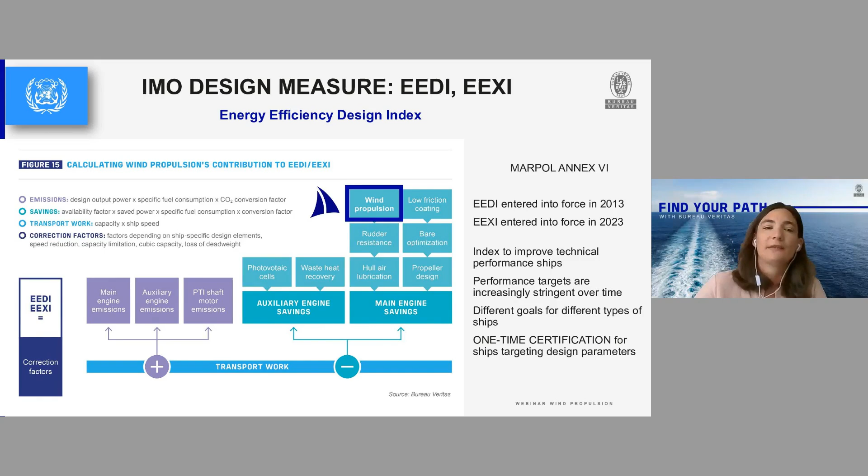So now, to go into detail on the EEDI calculation, on this slide you can see a big formula. What I want to show you here is how wind propulsion impacts the calculations. As I mentioned just before, wind propulsion contributes as a main engine savings device by deducting the available effective power of wind propulsion from the main engine power. I also want to highlight that wind propulsion can reduce deadweight capacity due to increased lightweight, and this impacts EEDI and EEXI calculations, even though it's generally a minor effect.

Concerning calculation of the effective power of wind propulsion, it is provided in the IMO guidance, circular 896, which defines calculation of the wind propulsion power and the power consumption of wind propulsion systems that needs to be added. We also note that by sorting the force elements in descending order and reducing the wind probability to the half with the best performance, it is a form of weather routing. It considers that the ship will reach wind conditions suitable for the wind propulsion system, and this method is debatable today.

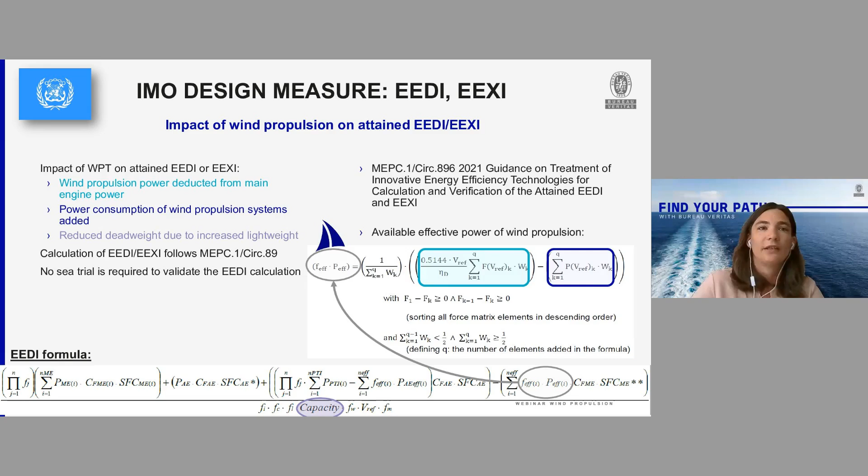The calculations involve complex matrices. They include a force matrix, which can be determined by wind tunnel model tests, CFD or full-scale tests, provided by the wind propulsion provider. They also involve a power consumption matrix, also provided by the wind propulsion provider, and the global wind probability matrix, defined by IMO guidance 896. All of these matrices are given according to wind direction and wind speed, with 5 degree steps for wind angle and 1 meter per second steps for true wind speed, from 1 to 25 meters per second.

It is worth noting that the results of this calculation method may differ from actual predictions, because only one ship speed is used, the reference speed, and not the operational speed profiles. The ship draft is also usually at maximum summer load, and route optimization is not really considered. We have seen that it considers the half-best performance with good wind conditions, and the local wind conditions for specific routes are not confirmed, because we consider a global route and not a specific route. That's why I don't recommend using this EEDI result to predict savings for specific routes on ships.

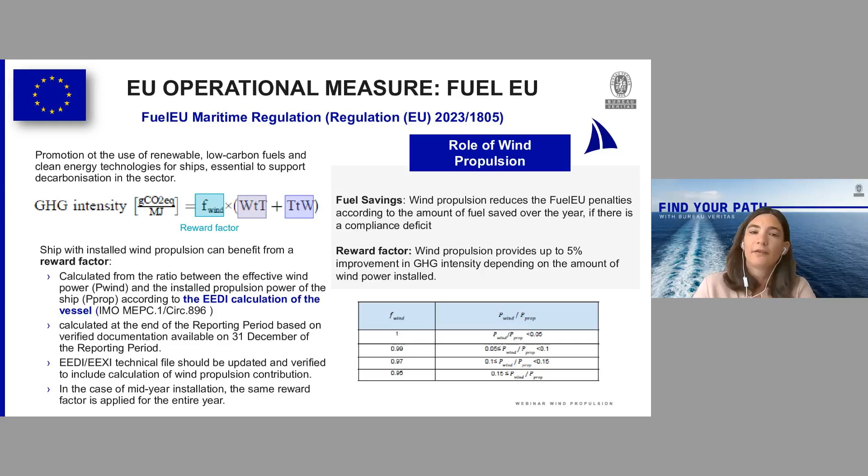It is also important to note that in case of mid-year installations, the same reward factor is applied for the entire year. So for a retrofit of the wind propulsion system at the end of the year, it allows the application of the reward factor for the entire year.

So now let's dive into a practical example to illustrate how wind propulsion can impact compliance and penalty under the FuelEU Maritime regulations. So here are some examples. In the first scenario, we have a wind propulsion system with a power output of 900 kilowatts and a main propulsion power of 7,000 kilowatts. It gives a reward factor of 0.97, and it means that the compliance balance improved by more than 1,000 tons CO2 equivalent. And so the penalties are completely eliminated, achieving a reduction of 100%.

So for example 2, in this scenario, the wind propulsion system is operational for the full reporting period with a power output of more than 1,000 kilowatts, and the main propulsion power is more than 6,000 kilowatts. So the reward factor we get is 0.95, and it improves the emissions by more than 2,000 tons of CO2 equivalent. So the penalties here are also completely eliminated.

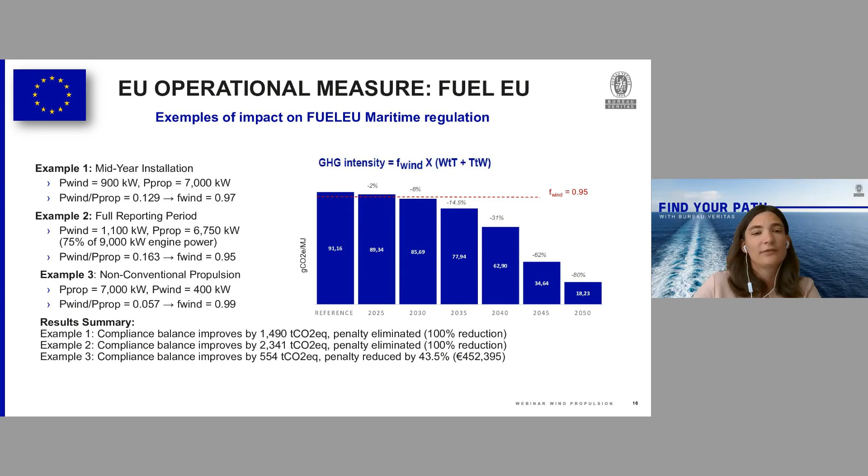For example 3, the main propulsion power is 7,000 kilowatts, and the wind propulsion power is 400 kilowatts. So we get a reward factor of 0.99, and it improves the emissions by more than 500 tons CO2 equivalent. So the penalties are not totally eliminated, but are reduced by 43%, equating to savings of 452,395 euros. So this example demonstrates that it is possible to eliminate partially or totally the penalty when considering wind propulsion installations.

So another regulatory framework for European emission reduction is the EU ETS, the Emission Trading System. There is no special consideration for wind propulsion under this mechanism, but wind propulsion will have an indirect impact based on fuel savings. For example, with an allowance at 75 per ton of CO2 equivalent, each ton of fuel saved equates to approximately 300 euros in avoided EUA cost. So with the examples presented in the previous slides, we see that the costs saved from fuel savings from wind propulsion are between 41 kilo euros and 175 kilo euros.

So to finish on the regulatory landscape, I hope that you have noticed that the IMO GHG Fuel Intensity, GFI, mechanism presents very similar figures to the European regulations in terms of methodology and trajectory. So the economic element of the IMO measure can be compared with the Maritime EU ETS. This raises the question of what consequences this comparison might have for European regulation, alignment, or articulation. So according to the EU regulation, the Commission will examine any global IMO measure regarding its alignment with EU objectives and consider possible articulation or alignment to avoid duplicating regulations.

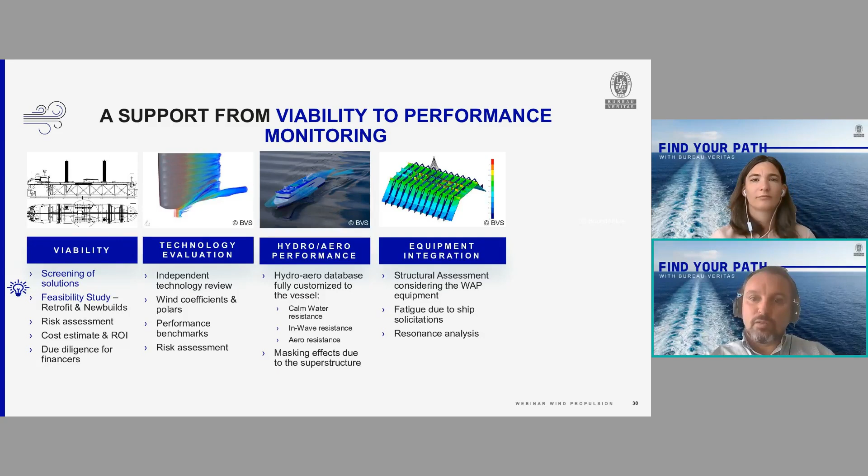Finally, when you have decided and you go for one given system, we can support you in the integration of such system on board the vessel. So we did some integration of such systems on decks of several vessels, and here we can either propose the scantlings of this integration into the decks, or reinforcement if it is about retrofit. And indeed, fatigue and resonance can also be topics that we are dealing with.

And finally, perhaps, and for sure, the most interesting for ship owners will be the savings. So, depending on which stage you are at in the project, we can propose the suitable service. So forecasting is the first step, and I will explain after that. Assessing what are the actual savings. And thirdly, when you have this, how to better operate, how to optimize the use of such wind propulsion.

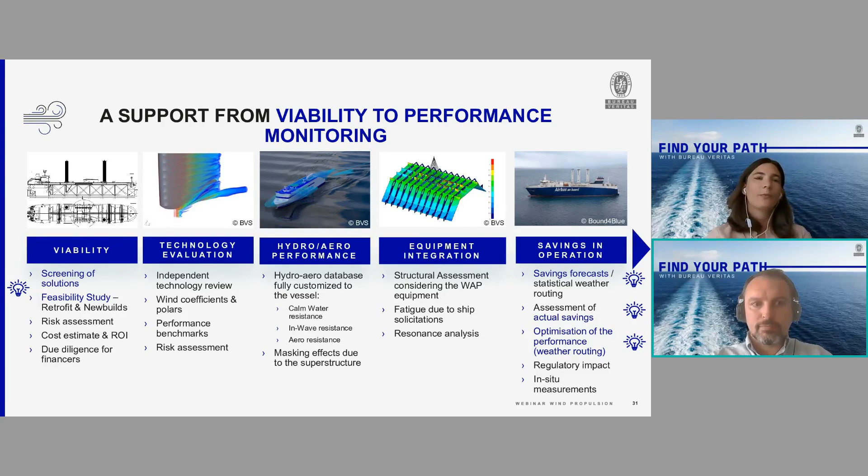Yes, so here, just maybe in summary, we can bring the necessary support at all times of the project. Yeah, it's a lot of study. But what are the first questions the team will ask when starting the wind propulsion evaluation?

So the first step and the key consideration when you evaluate the wind propulsion, the first question is, can I consider wind propulsion? So is wind propulsion worth considering for my specific situation? What is the potential of wind availability, as you talked about before, along my routes? What design and operational constraints may I have for this implementation? For example, typically the air draft, when you have a limitation due to some bridges.

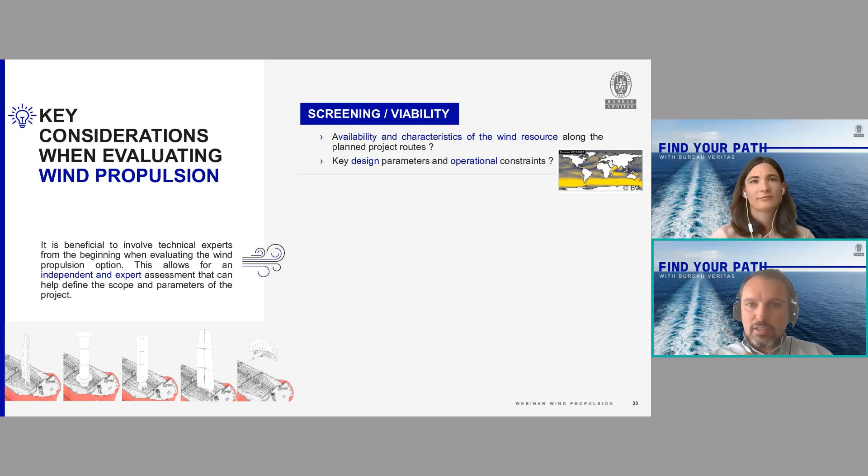So the screening and the viability is key to start and to have a quite exhaustive overview of what would be reasonable or feasible globally, but with a rougher approach. Then the second step is the technical perspective. So whether for new construction or retrofitting existing vessels, the technical questions remain similar. How can we make wind propulsion technically feasible? What impact will I have on my vessel, for example, on the lightship, as you said, on my deadweight?

How much can I put such systems with regards to the stability? How will my, for example, my seakeeping be okay? And the third one is the economical aspect, the financial perspective. So really it is where the ship owners will decide, and maybe charterers and ship owners will also find agreement.

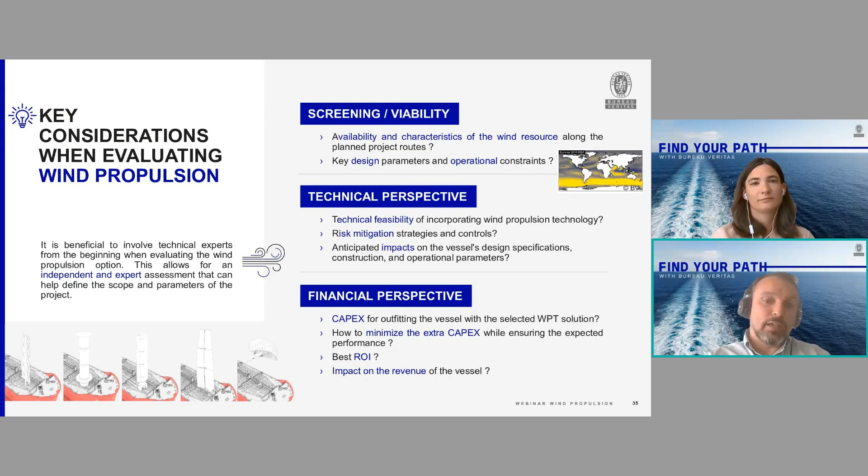The capex of the vessel with this wind propulsion will change due to the installation and adaptation of the vessel, and also the cost of the equipment. So, what is the best investment for me? What are my objectives of reducing CO2 emissions? How can I optimize the money I spent and the savings I have? What are my best solutions here? Return on investment is really key.

Maybe installing 3 wind propulsion systems will be more adapted than 4 to one given vessel. And some of these installations might also impact the revenue of the vessel. So if you have to install, you decrease your deadweight, or you can't load as high due to stability, or you take some space where there was some cargo, then your revenue can also be affected by this installation.

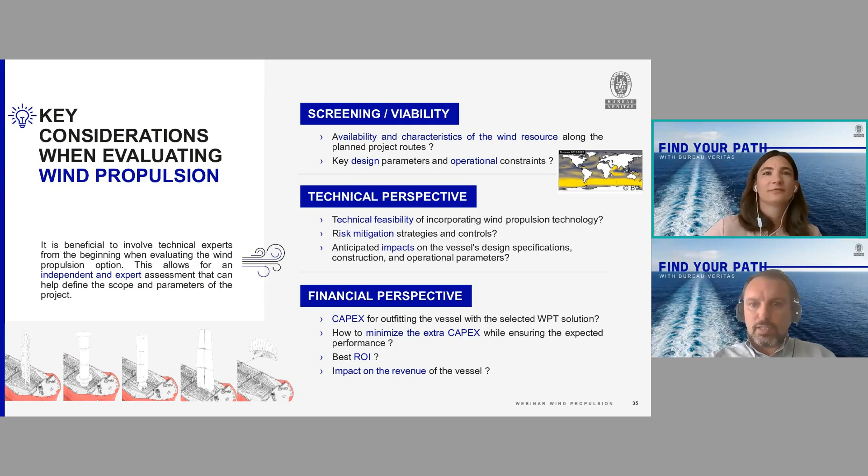So these 3 aspects really have to be looked at thoroughly. So screening as a first step, and technical and economic perspective at the end. Yeah, and we see that the performance is a real key parameter. And so how can stakeholders ensure fuel savings when adopting wind propulsion? So here we will talk about forecasting. There are different levels of forecasting. It is essential when considering wind propulsion systems.

The depth and accuracy of such saving forecasts will necessarily depend on the stage where you are in the project. During the initial project phase, the screening of potential solutions mainly relies on basic information provided by equipment suppliers. These assessments are typically based on a simplified approach and more or less generic vessel models. So they offer here a kind of order of magnitude for performance expectations and also costs.

So this is sufficient to decide to go further, but then you will understand that you need to have more accurate figures in order to really have green light to go and to install and to make it real. So as the vessel design becomes more defined, then you can think about performing some detailed assessment of the specific ship and the operating conditions. Because you know all this design and all these operating conditions, you can simulate through an enhanced ship energy model. That's why we really need a very good model, not generic, customized to the vessel, and we need to be accurate in the process.

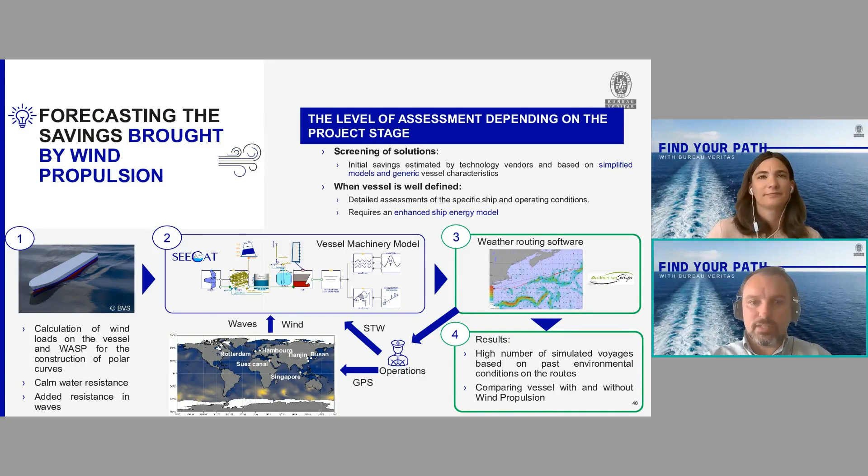Okay, so we have forecast here the savings. But now, how to assess the actual performance versus these predictions? Yes, this is indeed the next step, Aude. So assessing the actual savings, you need to have a robust baseline reference, because otherwise you don't know to what you can compare. So it is necessary to have a good vessel model without the wind propulsion,

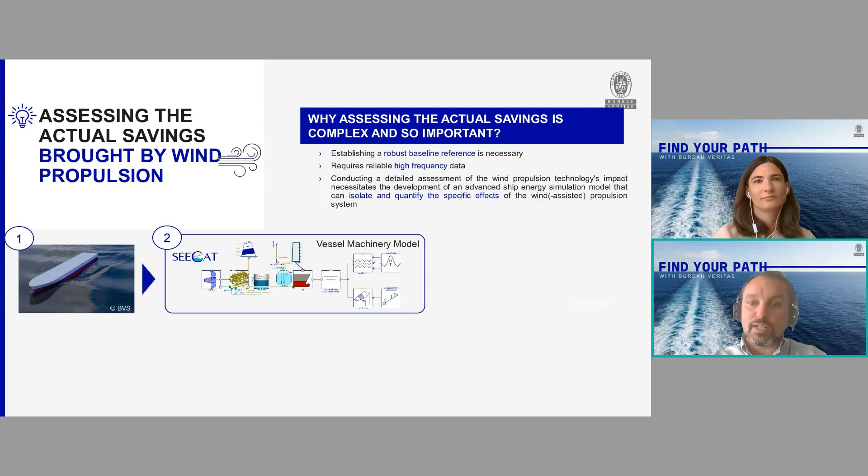and you can compare this way. So that's why here you can see that we use the same ship energy model built with a strong hydro-aero database and a strong vessel machinery model. Then the input will be different. This time you don't have the forecast of the routes, but you have real routes. You have the real data. So here you require reliable high frequency data coming from the vessel.

There is also good knowledge, good expertise here to clean, to know which are the valid conditions to be used, how you filter this, how you qualify whether this data is good or not. And then doing that, you are able to say, okay, I was there at that time, so either through this model or maybe with an anemometer, if it is considered reliable, we are able to have inputs again into the ship energy model and to say, okay, you had such consumption, you should have such required power on the main engine, and finally you have less.

So we are able to estimate both power savings and consumption savings, because with this ship energy modeling, we are able to really consider also the consumption of active systems. Yes, and maybe just the results. So you have the savings as a function of wind conditions. You can have the percentage and the analysis for a given apparent wind speed and apparent wind angle. You have such amount of savings.

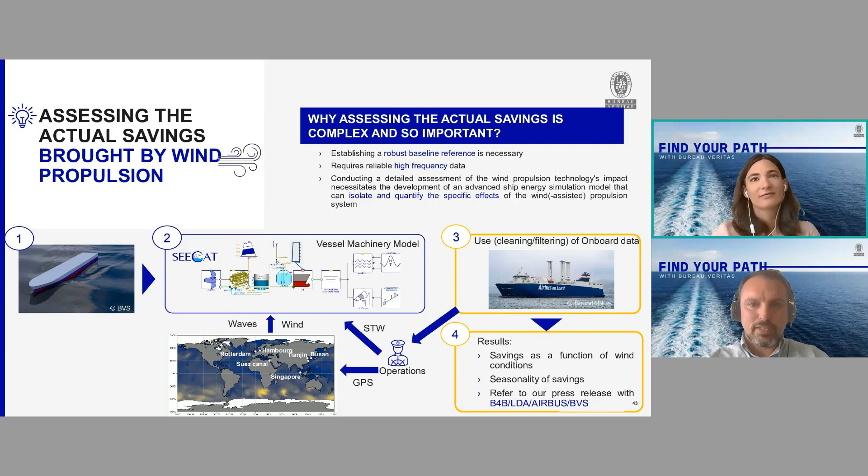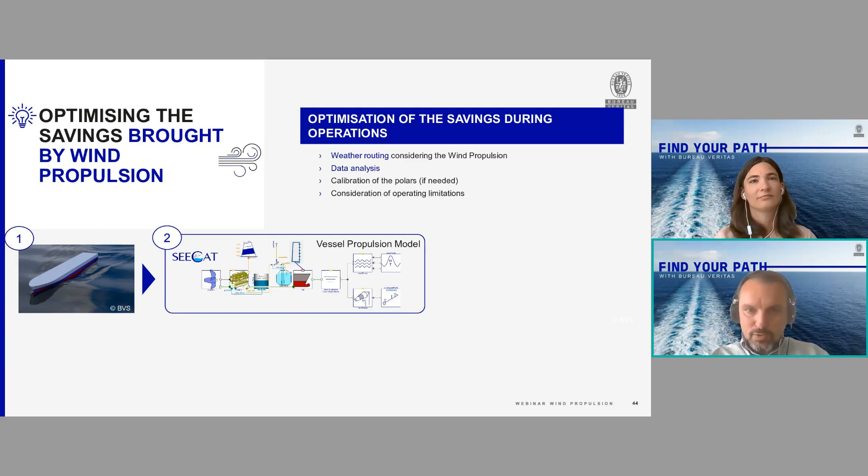So once operational, I imagine that it is still possible to increase the wind propulsion savings. Absolutely. So that's why here we have this slide. So again, we can use this model for the ship energy modeling, because we developed this partnership with Adrena, and we can have an onboard weather routing, which will enable us to use the ship energy model developed with the wind propulsion and to optimize the route of the vessel.

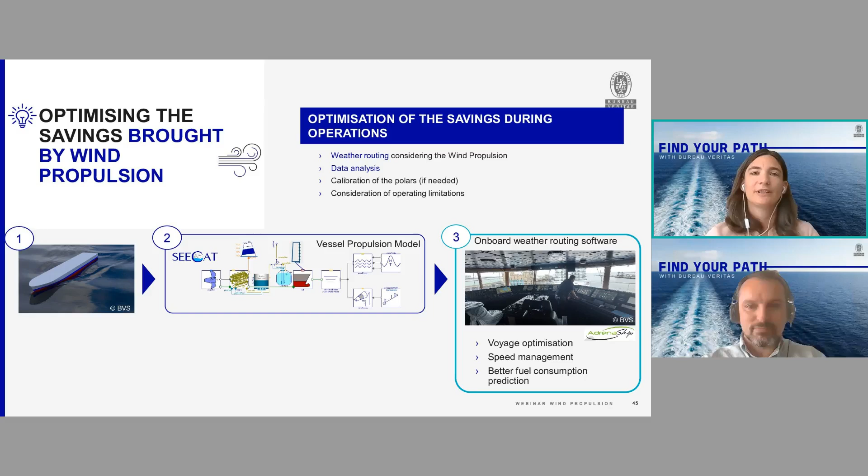So optimizing the route will mean determining the good route, but also determining the speed management over this route, and at the end of the day having a good prediction of the fuel consumption with this system. So thank you, Johan. So to conclude our discussions, what final thought would you like to share?

We are currently in an extraordinary, exciting period for maritime technology. Over the past two or three years, wind propulsion has really emerged as an increasingly significant topic in the industry. There were many projects and successful implementations on both retrofitted vessels and new constructions. So Bureau Veritas Solutions offers its full support to this transformative technology. We will be delighted to hear about your needs and your upcoming projects.